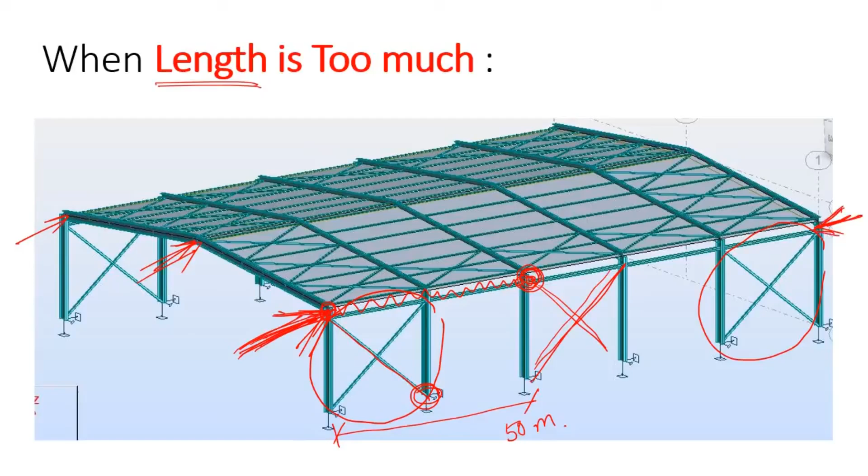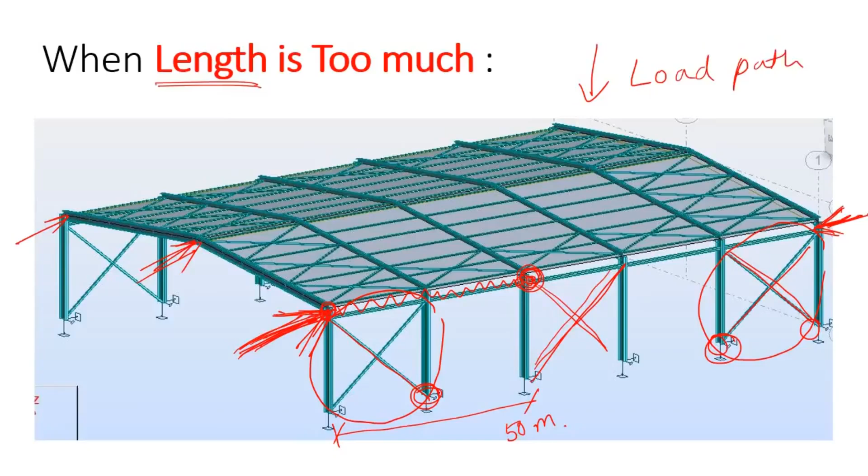Okay, so by this method we can reduce the load path, right? Now again there is a problem. Let's say in between these two bracing, this length is 50 meters or maybe more than that.

In that case, due to thermal expansion or temperature effect, this particular zone tries to expand, but at both ends you have locked the structure by the provision of bracing, as a result of which this thermal expansion is resisted, or indirectly a huge amount of thermal stress will be generated. So it is always suggested, if you have to use two different braced bays, always try to incorporate that in some middle portion of the structure, so that in between two braced bays the length is not too much, which can cause a large amount of thermal stress.

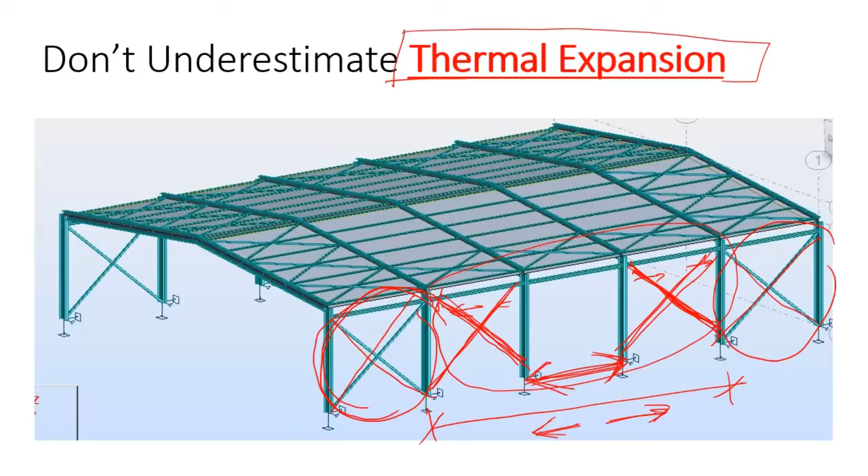So here I suggest to use the bracing like this and this. Also, let's say instead of pile foundation you need to use shallow foundation, or the raft footing or the isolated footing. So in that case what will happen? Now we are not using this bracing, we are not using this bracing, we are using this bracing and this bracing to cater the thermal effect, right?

Now let's say to provide the foundation for this column and this bracing, you have to use a shallow footing like this and here like this, and you know that the foundation requirement at the braced bay is higher compared to a normal column. So in that case, what you can do, you can simply put two braced bays side by side, because then you can use this foundation as a common footing.

So now what will happen? Instead of using these two braces, we are using only this brace and this brace, and this is from an economics point of view. So we have eliminated this one. Okay, so this is about wind load and seismic load related to the structure of the building.

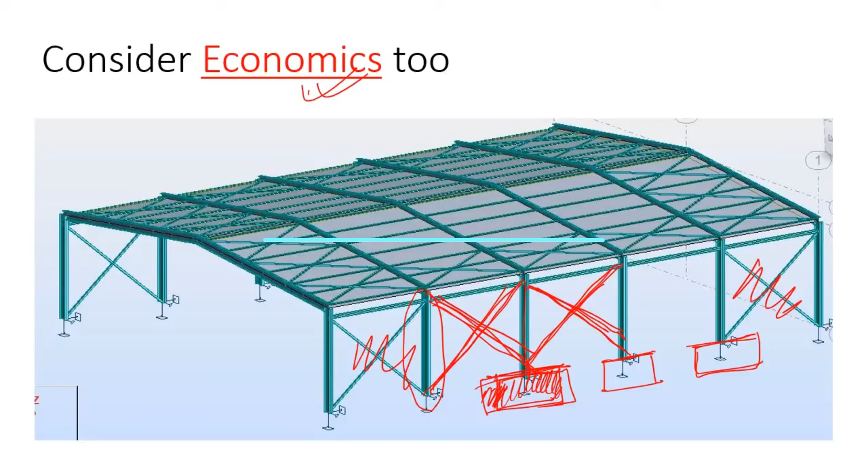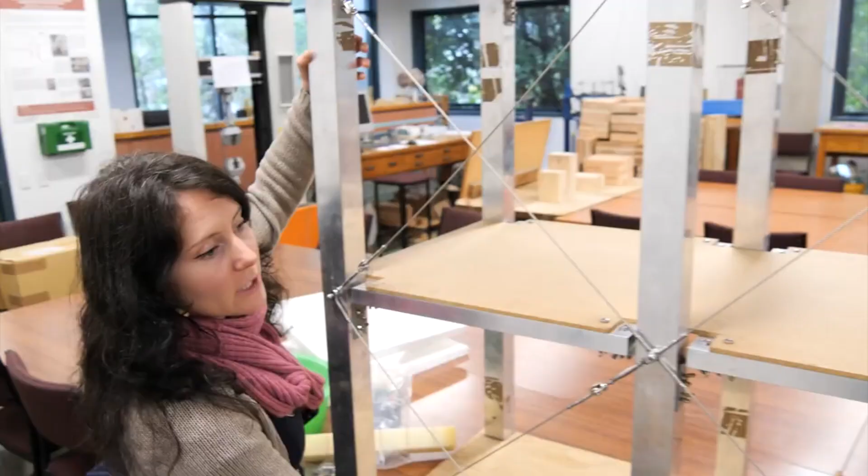First, I'm going to pull it like I did before. I'm pulling pretty hard and it's not going anywhere. I'm going to push it and it's still not going anywhere. So if we had a big earthquake, pushing and pulling, this is much stronger than it was without the cross bracing.

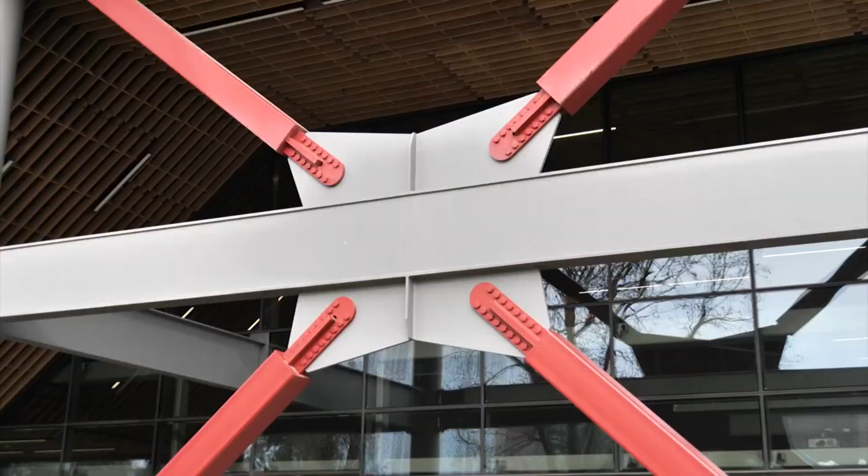The great thing about Christchurch is the architecture has changed so much since the earthquake, and everywhere you look are examples of different cross bracing. This is the Ernest Rutherford building at the University of Canterbury. As you can see from the outside, you can see cross bracing throughout the entire building.

So the big X's are just like we showed with the example. When the building goes this way and when the building goes that way, the cross braces help it keep straight.

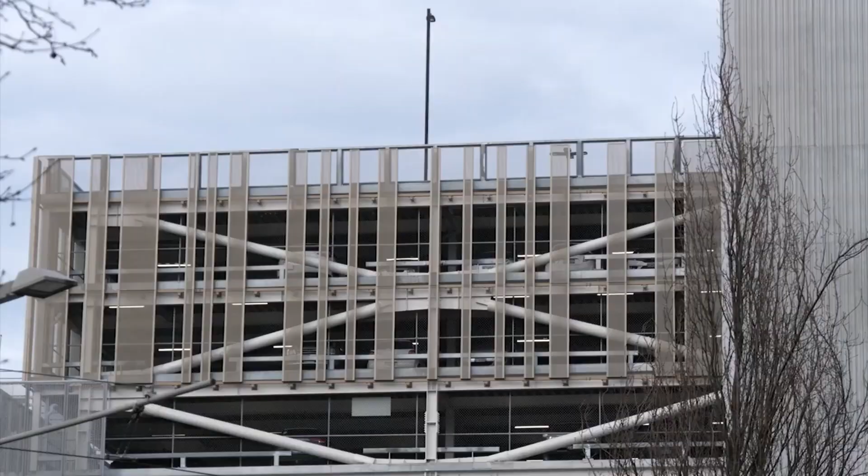So what you normally think with cross bracing is an X, but actually it can be a lot of other shapes, as long as it's facing this direction and this direction, it doesn't matter where. So here you can see a good example: instead of having this, it's just translated this way. But if you think about pushing the building that way or this way, it's still holding up with those diagonal bracing. So up here, you still have your cross bracing going this way and this way.

So it doesn't matter, again, as long as one is going this way and one is going this way, so that when we push the building in either direction, there is that cross bracing holding it up.

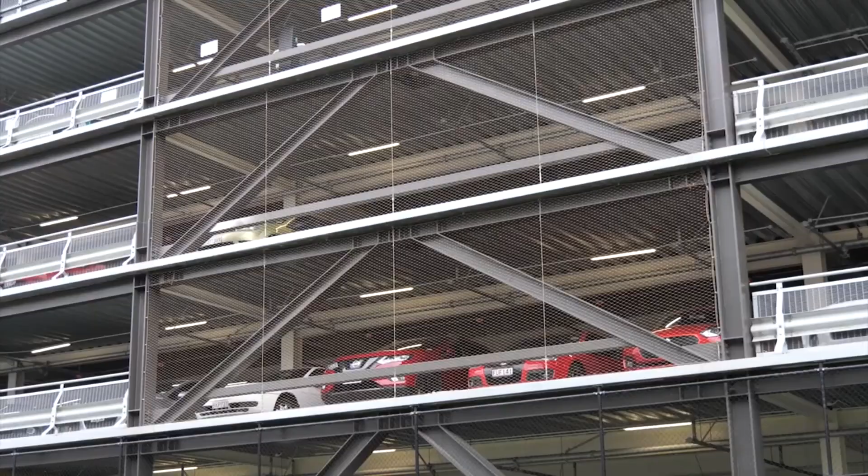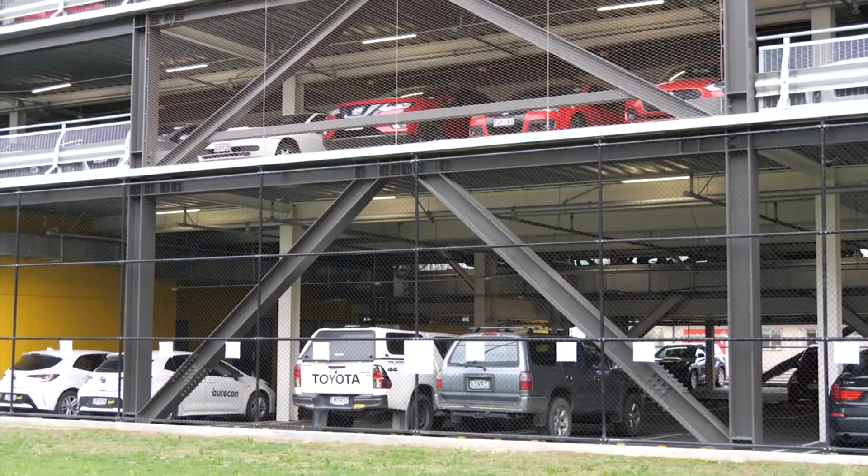So one last type of shape is eccentric bracing, where you have the two angles going together, and in the middle you have a joint where they don't fully connect - there's a gap, and that is called the sacrificial joint. So with eccentric bracing, when the building shakes, all the forces are pushed into the middle. So if there is any destruction in the building, it will be in that small link, which can then be replaced and the building can be used again.